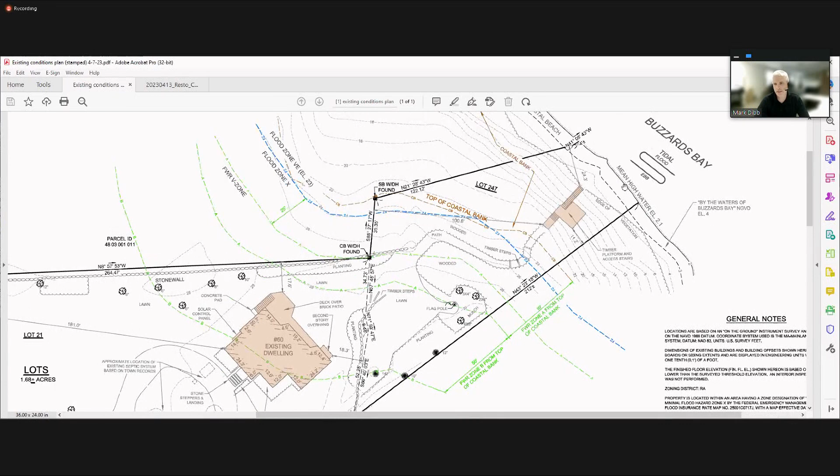On the parcel, in the upland portion, there's a tennis court, turnaround driveway, existing dwelling, and a detached garage. In the area where the work is being performed, the property has kind of an odd shape, but it does slope down towards Buzzards Bay. Resource areas on the site include land under the ocean, land containing shellfish, a coastal bank, and the buffer zones are shown on the plan as well.

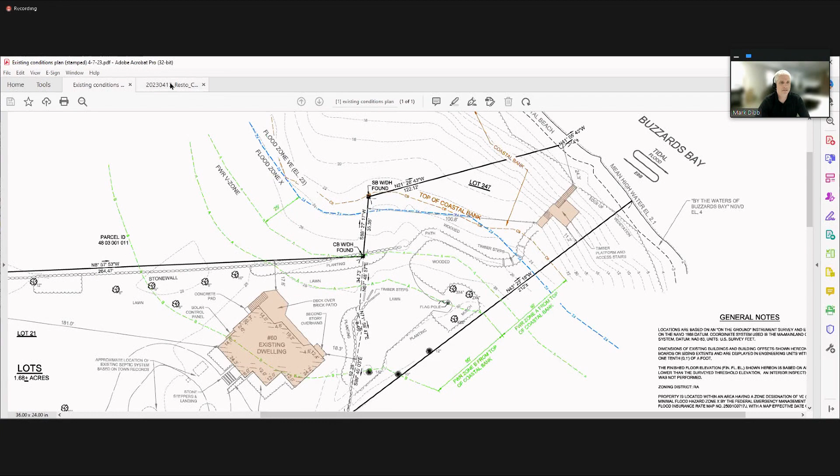Basically, at this point, I'm going to give it over to Matt Lautenberger to describe Wilkinson Ecological's design for the project. Thanks, Mark. I'm going to go ahead and share my screen if that's okay. All right with everyone. I think I have to stop sharing here. Hang on, okay.

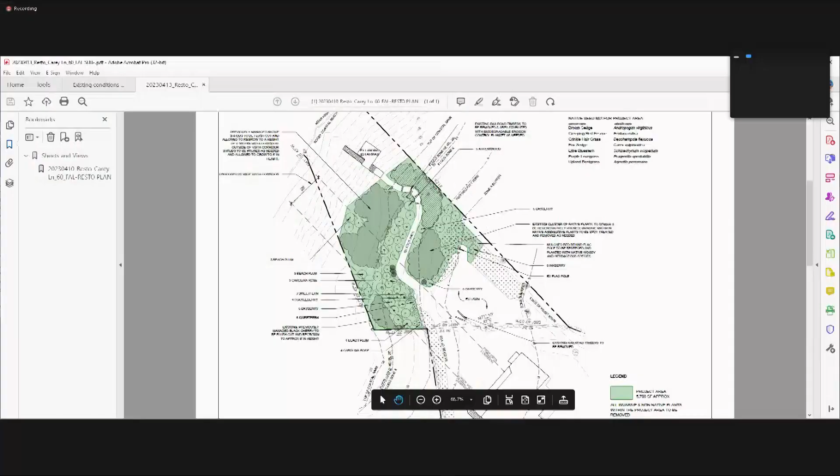All right, everyone can see that? Yes, yes, okay. So the plan itself is relatively simple. There's invasive species on site that we're proposing to manage.

I'm going to go right into the staff comments point by point. The staff has concerns about the proposed flush cutting. So just to specify, in case there's any confusion over where we're proposing the flush cutting, there's specifically a previously pruned cherry tree over here that we're proposing.

And then we'd also be proposing the previously pruned bushes that are in the view corridor. We wouldn't be flush cutting anything that was outside the view corridor.

And the specific reason for doing this is that it would give the plants a chance to regrow. Right now they're very block-like, all of the vegetation's up at the top of the plant due to years of just regular pruning. Flush cutting it would give it a chance to regrow and have a natural, healthier biomass.

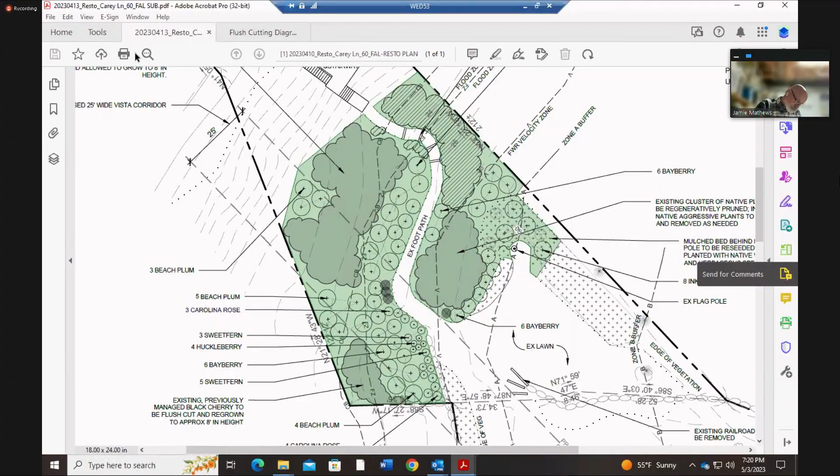Matthew, we'll have to have the plan revised - thank you for going through the staff report point by point, that was helpful. But in the area where you have the flush cut shrubs to be maintained to a height of 8 feet, when we go to staff comment number 4 about shrubs outside the vista not to be managed to any height - it's because in that area you have that 8 foot note. So we just want that taken out. When we come back to you with another updated plan, we'll split that into 2 different management areas, separate. And then the 8 foot height on the shrubs, when you're pruning them, just take that off.

Okay. And I was reading something while you were talking about the cherry. What's the point of managing the cherry to 8 feet in height?

So again, right now the cherry is very beaten up. When it grows in, it's very patchy. The nice thing about cherries when you flush cut them is they spring back right away, and we've seen multiple examples of this. It's something we do pretty regularly, where the cherry can get as high as 4 feet in a single growing season. I actually have some pictures of that if anyone's interested. It'll just provide that area, it'll function more as habitat and as a tree should be functioning in the environment when it has a chance to be flush cut and then regrow like that, because right now it is sort of sickly.

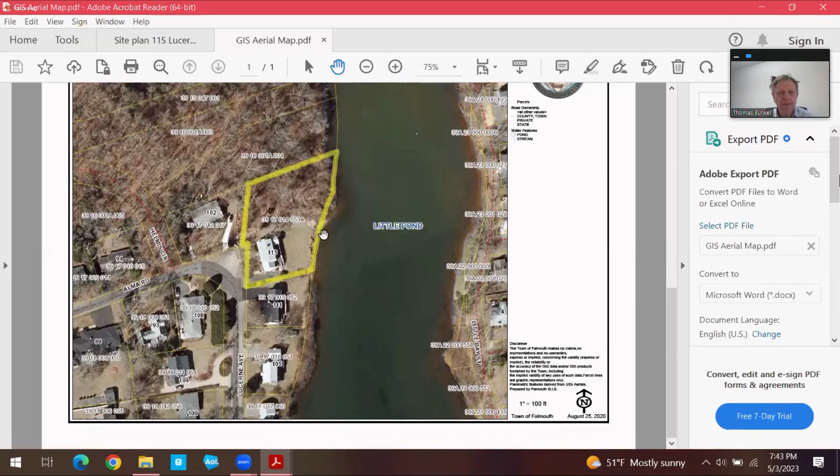So this property, as shown in the locus map and described in the narrative, is at the northeast corner of the intersection of Alma Road and Lucerne Avenue. It's this property right here. It fronts on Little Pond, toward the upper reaches of Little Pond, where it's slightly tidal still.

They have, as described there, this lot here, which was historically part of the house lot. And at some time 5 or so years ago, maybe a little longer, this vacant lot was added to the property. That was when it came up that this subdivision, Helmus Circle, or this land was being subdivided, so they acquired this piece as a sort of a buffer.

It's noted by the staff that there has been cutting going on there, cutting and some grading and things going on in this wooded part. I could tell you that Mr. Volpe is quite interested in native plants, the natural community, and he's also quite active in cutting out bittersweet and other non-native plants. So there are paths and such cut through there, but it was really, in his opinion, for the betterment of the project. Although cutting was done in there without permission, and the staff has comments on that. So we'll get to that.

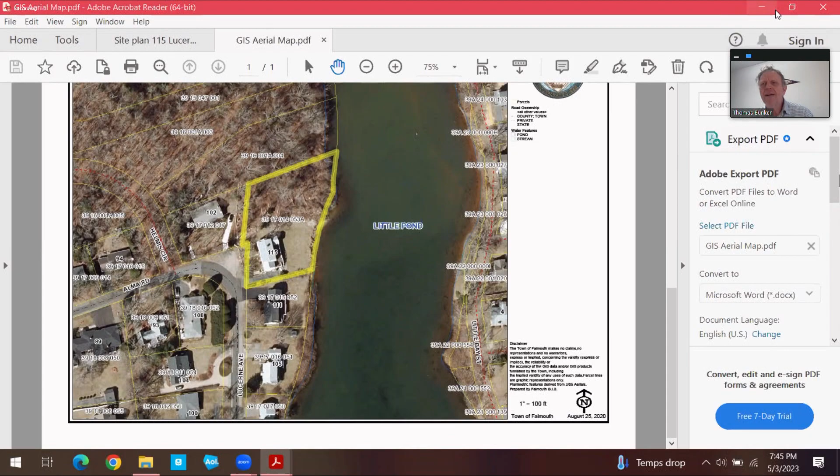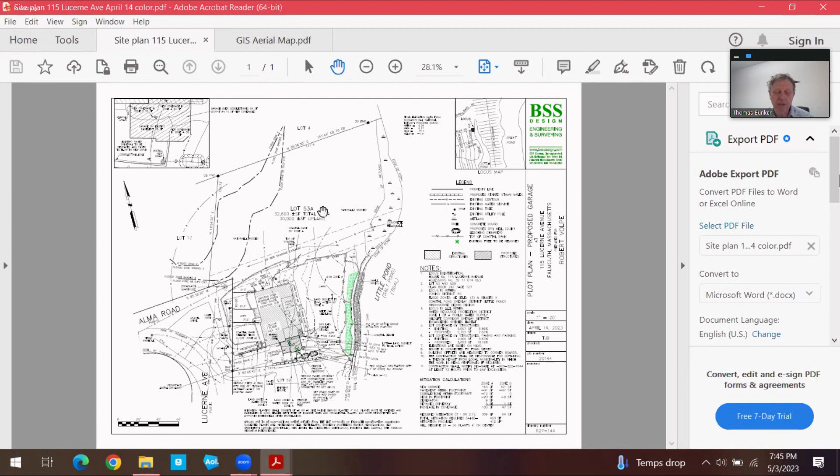So then we have this. I was aware, he showed me around some of this area. I wasn't aware of everything that was going on in there, but aware that he was cutting vines. It was not, in my mind, part of this project, but it is some unpermitted work on the property.

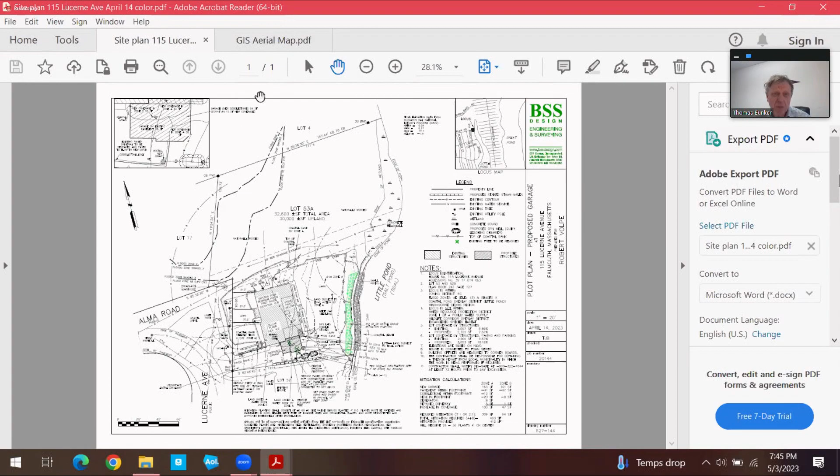But anyway, what the project here was filed to accomplish was to construct a one-car, fairly awkwardly shaped one-car garage here. It's trimmed off, a little extra narrow here for zoning reasons, and it's trimmed off here to not go closer to the existing house. This corner would have brought it about 2 feet closer, so it's cut off about 2.5 feet. It is cut off at this corner in each direction.

Proposed here, and part of this garage will actually take up some of this porch, which will be trimmed back by 2 feet. And the driveway will be rebuilt, currently the water flows through. There's been some subsidence, you can see the pavement is in poor condition. There's water that flows down from Lucerne Avenue down this hill. There is a drain in this location, but that has somewhat failed, so it fills up and spills over. If you went there, you probably saw some sort of spillways going down toward Little Pond here.

The proposal, I can show you a little better in this enlargement. This shows the coverages in that the garage is going to be built partly over the existing pavement. This area is currently not paved, so this is all new coverage here, and this new coverage here. There are some cobblestones here, so we're counting about 50% of that area as coverage.

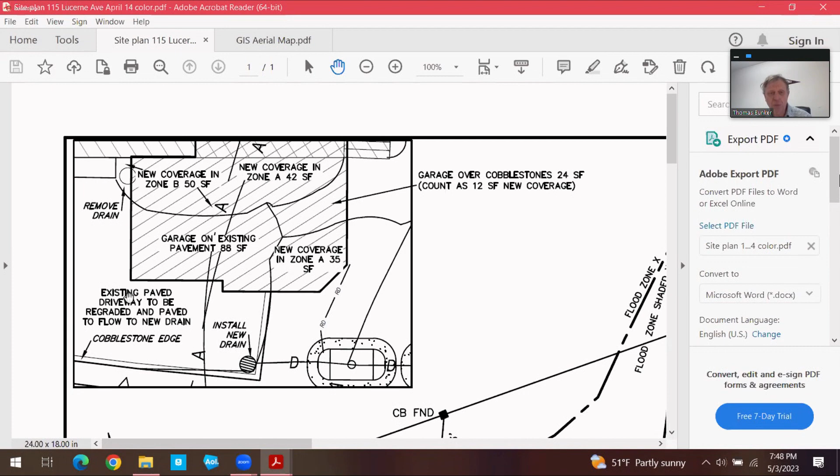And we'll put an edge on it to catch water, and this will be the new low point of the driveway here, which will catch the water and go into a couple of these infiltrators, Quik-4 infiltrators with stone around them to drain. Also it will be connected, I think on the other one, to the drains from the garage roof, which will go into these as well.

This area through here currently, there's a retaining wall in a flood zone, so it's considered a coastal bank, and he wants to rebuild that retaining wall. So this technically is work on a coastal bank, but the wall is pulling away from the house at this corner, and sediment is going through. So it will make it a more stable coastal bank, and instead of one tall wall at this corner, it'll go up about 3.5 feet, and then the next section of wall will be set back another 3 feet, with planting in the terrace in between them.

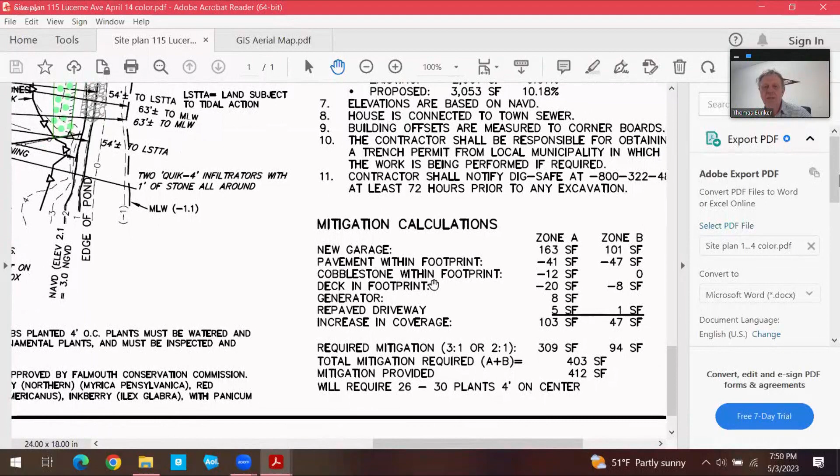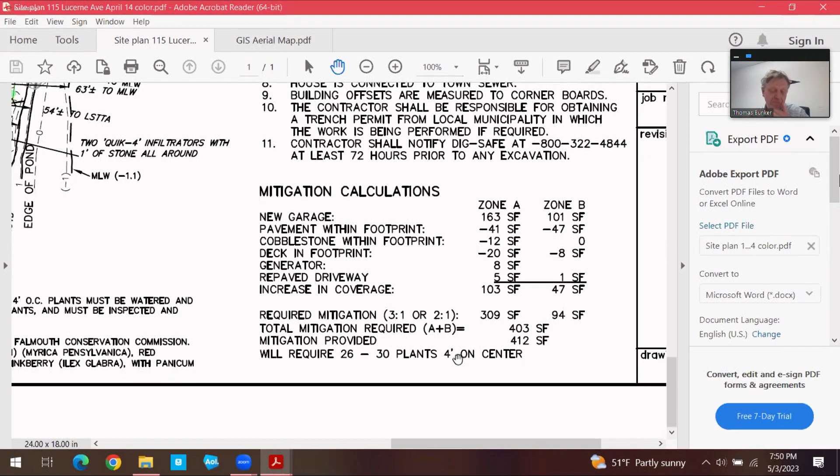The generator, the driveway. So I have 403 square feet required, and it's shown as 412. We had suggested 4 feet on center. I understand that staff wants the 3 feet, but we have that spread out along the shore here. I can go through a couple of the staff comments. There is a sandy area here, and some of these things were there before Bob Volpe and Sandra were involved in this, but staff recommends to restore this as lawn.

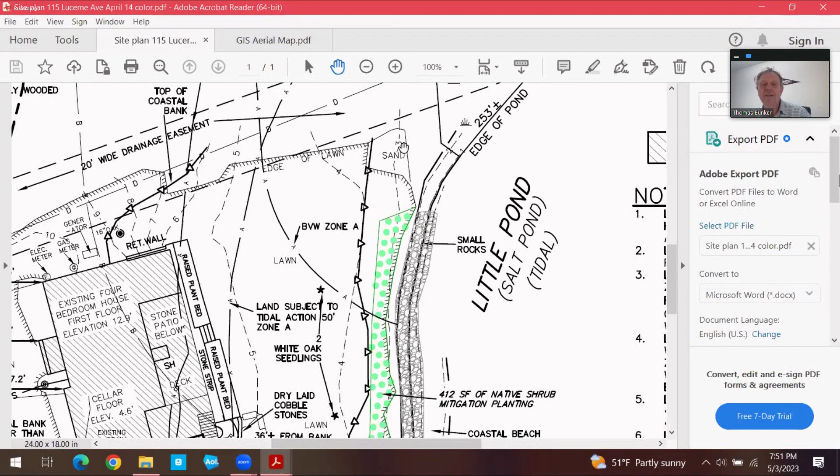It is currently, he says, a snapping turtle nursery. They come up there every spring to lay their eggs. So in a way it serves an environmental purpose to have that sand there. And I mentioned some of the other things where he had been - he likes to nurture plants, transplant them from other places and put them in here. So it is kind of an active area.

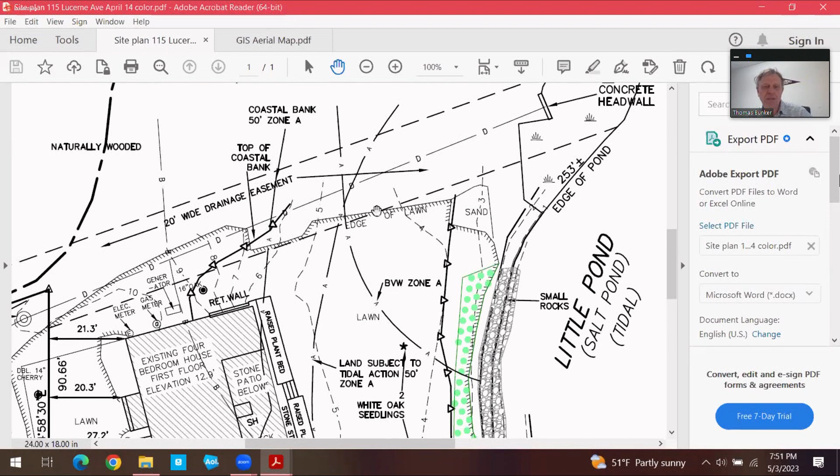I think we will have to have the meeting with staff on the site to go over it. Unfortunately, they're out of the country right now, but I think they're out this entire week. We'll be back next week.

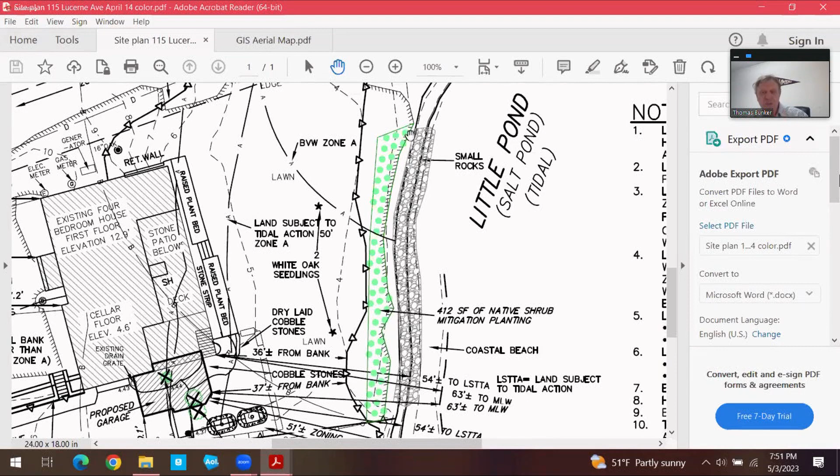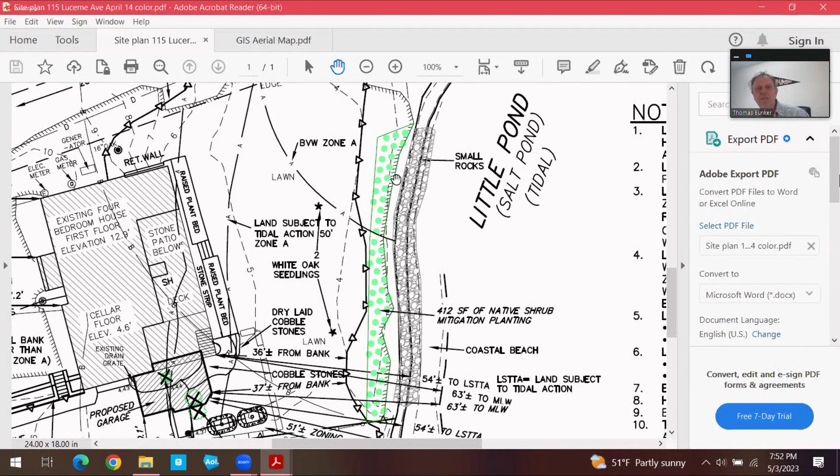And the several points that he made by a long distance email, he would like to have those grasses. He feels like the grasses are very good - the root system of those grasses are very good at holding the soil to reduce any erosion along here, the grasses. They would like to put the mitigation inland of the grasses, if we can leave that, but these are things that I think we can discuss with staff on the site.

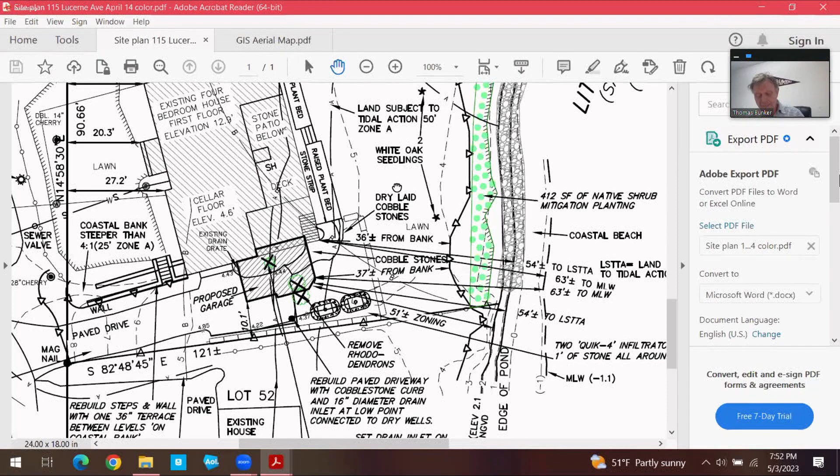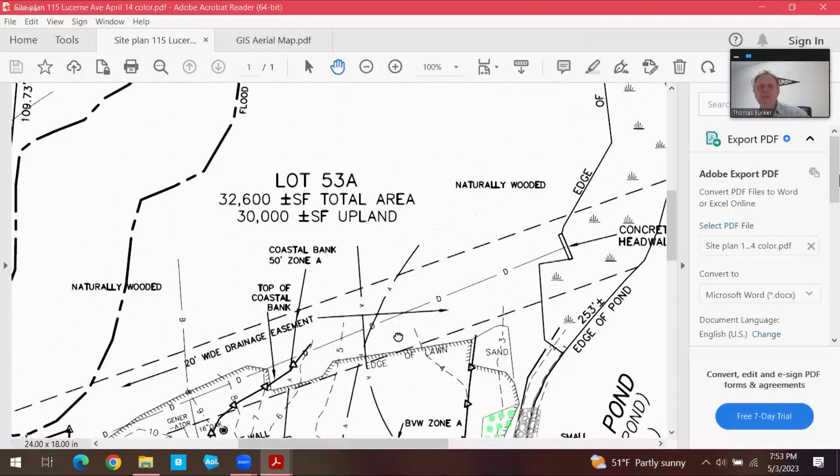There are a couple other things about the trees. Again, he had said that it's how the property was when he got it, which I know happens to a lot of people. He wasn't aware, and I wasn't aware, of some of these items that are in the staff report. So I will have to request a continuance because there are things here that I can't address at the moment. But I'll make notes as we go through staff comments. I'll take this down, take your comments, and then we'll get on with the continuance.

Thank you, sir. Ken? Yes, Mr. Chairman. So you're suggesting, Tom, that we continue this out towards the end of May so we can meet with your clients, correct? Yes. Okay, and that's to address the little garden area and the clearing and the ornamental grasses.

I think the ornamental grasses should be removed in that area, planted with shrubs. And if they wanted deep-rooted native grasses, that's behind the shrubs, and they wanted to put some amorpha in along the top of that wall, I'm fine with that.

If the area is being used by a snapping turtle, maybe we can put plants in front of it, put a little fence, like a little single rail fence. I don't know, but I'd have to go out and look at it. I know Melissa's been out there to do the field work. So I think there are certain things we do need to discuss, especially the managing of that adjacent property.

As far as the garage, I don't have any concerns, Mr. Chairman. Like I said, I believe that the ornamental grasses need to be removed and that native shrub layer go along the top of that wall, but that's something we can discuss with the applicant if they really want to discuss it with us. And then I think that we just need to be able to address the clearing on that other property. Right.

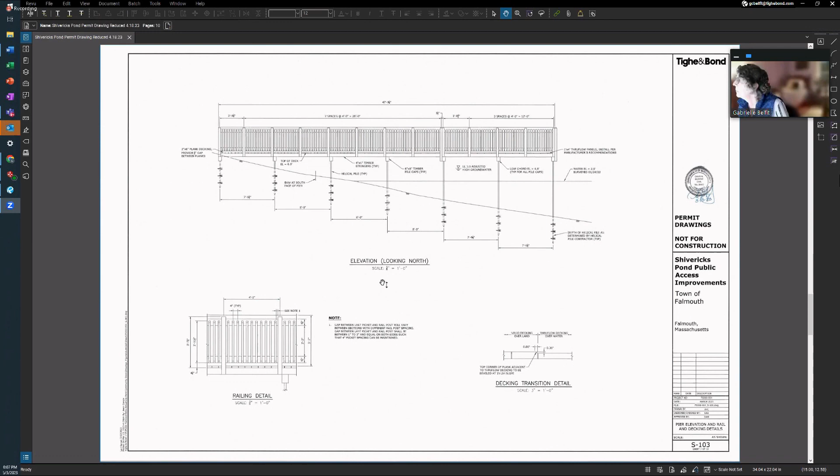Jed, do you have anything you'd like to add before we open up to commissioner comments and staff comments? Thank you, Mr. Chairman. For the record, Jed Cornock, Town Planner. No, I have no additional comments to add at this time.

Okay, I want to throw the opportunity out there. Jen? Yes, Mr. Chairman. So to follow up on Gabrielle's introduction, I first started talking about a pier in this area over 8 years ago with Paul Dreyer, who is on the planning board and was a member of the Coastal Resiliency Action Committee. I see Paul is in our attendees list listening. He and I stood where the dam is right now, where people fish off of, and started having the conversation with the town engineer that it was kind of a dangerous situation and we wanted to provide a more secure and safe fishing access point for the public on this pond. I think that through that conversation, that's how the 300 committee got involved, looking at all of Shiverick's Pond and improving all of this.

And this is kind of phase one of a larger project that this board is going to see. You're going to see a creation of a park on the parcel next door, so that will be coming shortly under a separate notice of intent. So this is kind of a master plan of this area. As Gabrielle alluded to, we've done some vista improvements. The town is going to be improving that roadway, adding a 10 to 12 foot shared bike and pedestrian lane on that side. So there's a lot of big improvements being proposed by the town in this area.

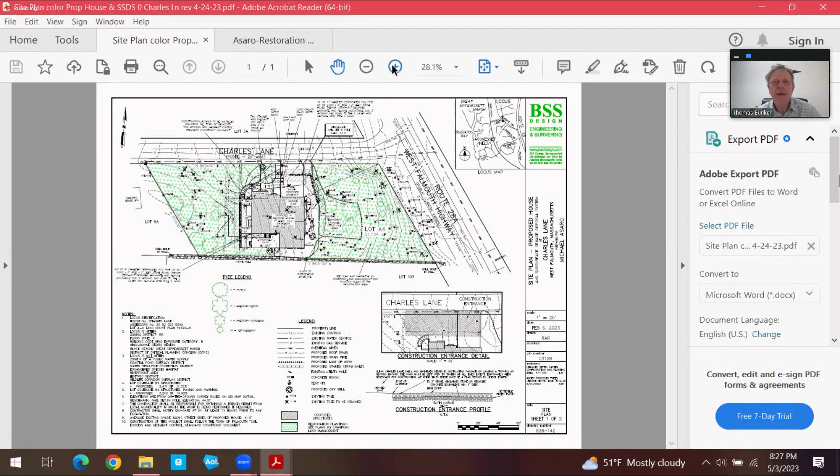So in our plan, we changed the planting to reflect what Crawford Land Management has put on their plan. As staff noted, CLM added more trees, so we have their trees noted on this plan. But we did not get into the type of fern or huckleberry sod. The septic tank that Jamie picked up is now an H20 tank, and that's also reflected on the profile on page 2. So that was our change.

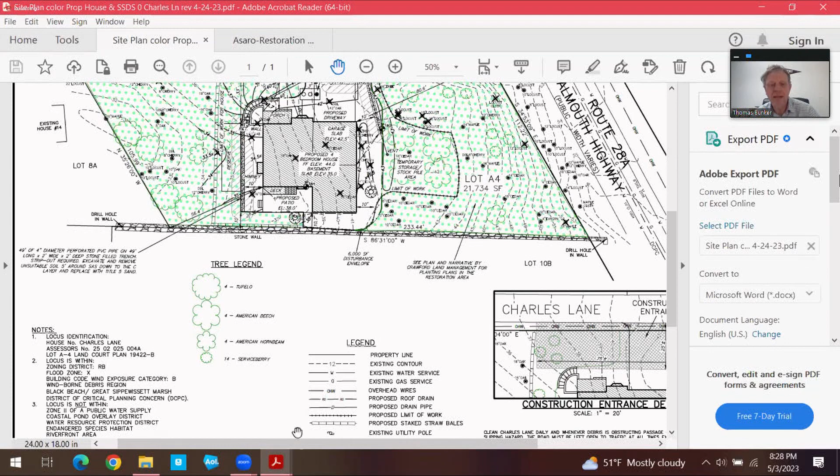There were no other changes from our side, except that we changed the planting plan according to what they had. So on their plan, this hatched area right here along the south and west was noted as hay-scented fern.

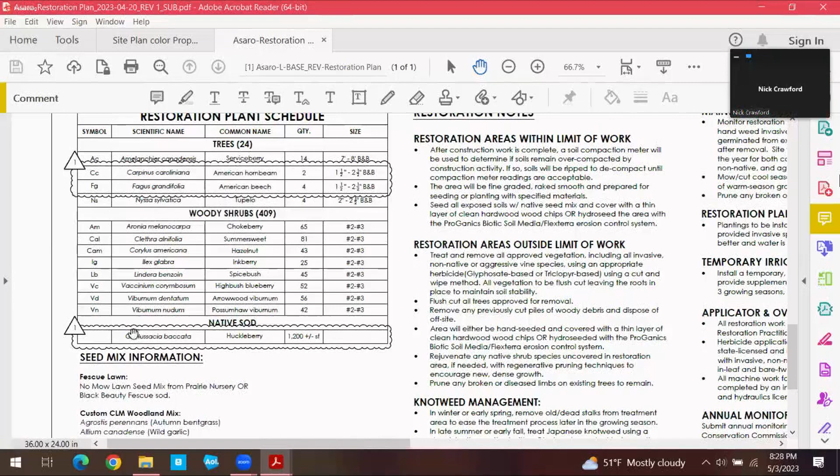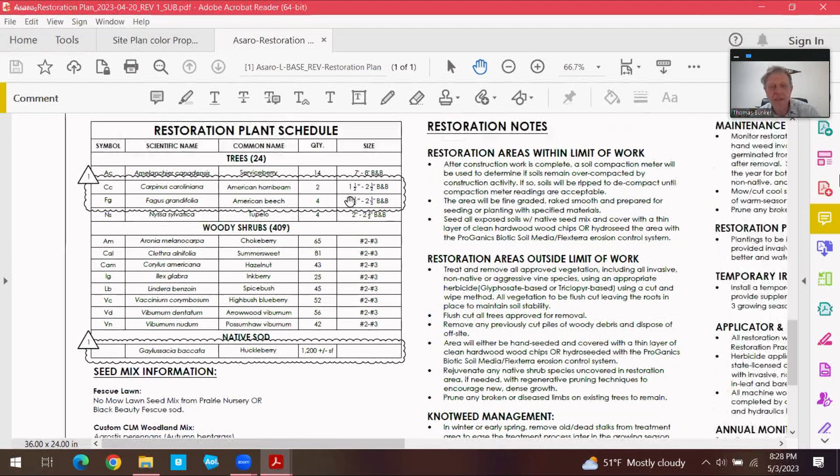But now I can go into - maybe I'm doing Nick's work here, maybe he won't have anything to say, but that's okay - Gaylussacia baccata, black huckleberry. I believe there's no hay-scented fern, just the huckleberry sod here, 1,200 square feet of it.

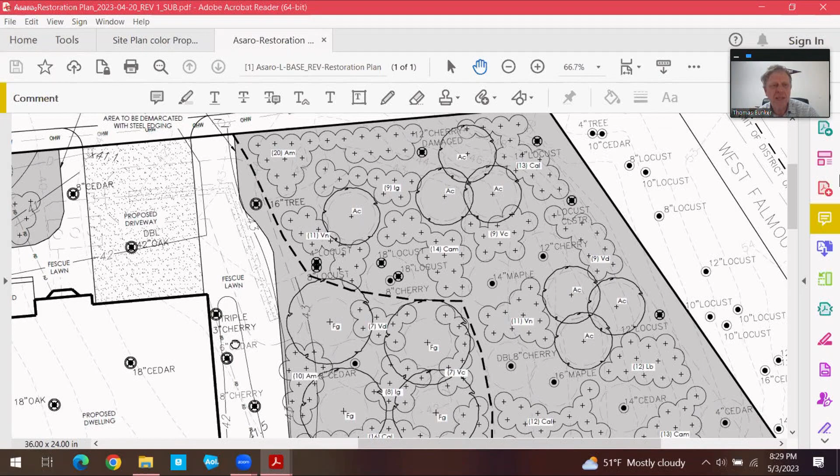And they added more selection of trees. I think it's because they took out - so this, the FG, is the American beech. They took out these locust trees, which was one comment; they said locusts are not native anyway. So they took the locust trees out and added other trees around them. I'm not sure about the AC, but if you need more explanation of the planting plan...

I will leave it up if Nick wants to put the plan up. Yeah, you can leave it up. So, Nick Crawford from Crawford Land Management - I think Tom hit on all the highlights.

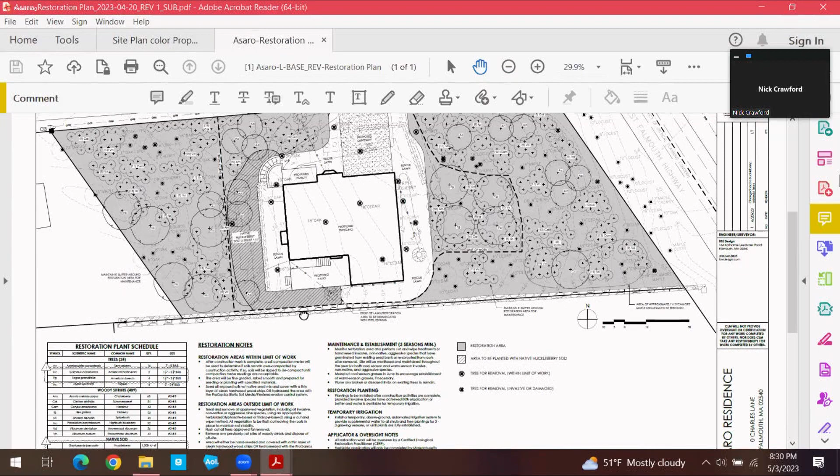We switched the hay-scented fern sod to the native black huckleberry sod, since there is already an existing overstory that adds a woody understory layer. We added 6 trees, 4 American beech and 2 American hornbeam. That ended up reducing the overall shrub quantity by 20 shrubs, just because we were giving the trees a 5-foot diameter buffer around the trunk that wouldn't be planted, in order to not affect the root zone. Those are really the only changes.

We had talked - I know Jen at Crawford had talked to Jen Lincoln - about switching the hay-scented fern to the black huckleberry. So I hope, I saw that there were no staff comments. If there's anything else you'd like explanation on, I'm here to answer.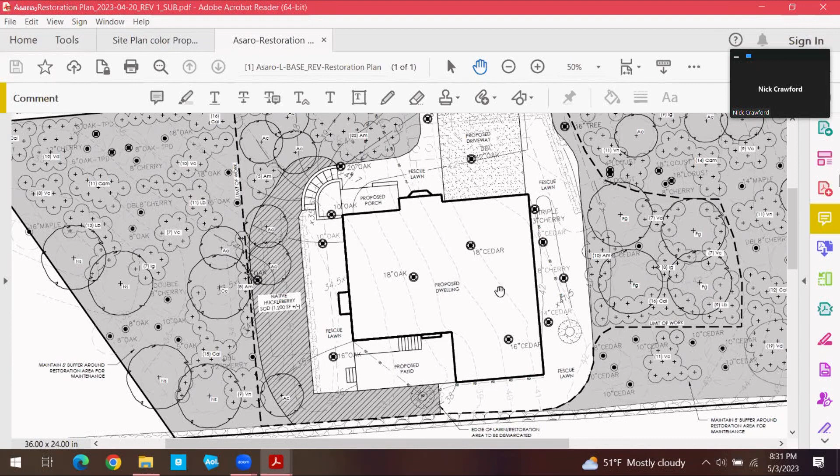Will I stop sharing? Thanks, Nick. Yes, sir.

All right, Jen. Yes, Mr. Chairman, I believe when Nick Crawford mentioned switching out the hay-scented fern to the huckleberry sod, staff was in agreement with that at the last hearing. So I have nothing to add.

Okay, Ms. Bergeron? I also have no comments. Thank you. All right, commissioner comments. Let's see, Courtney - no comments. All right, I'll just say thank you for addressing all our concerns. Thank you for the revisions.

Maury - I only have 2 comments. I would like to see, where they have the fescue lawn, the no-mow lawn seed mix from Prairie Nursery or Black Beauty fescue sod, that it's not going to be sod. And the second thing is just a comment: we're always about the 3-gallon or 2-gallon, 3-foot on center.

On Tom's plan, we see all the little dots that make it look like it's really going to be full. Then we go to the Crawford one and it's not really 3-gallon or 2-gallon, 3-foot on center. I think we need to start being consistent, just like we were on that one on Lucerne - that if we want dense planting, we don't want these little pockets that are 8 and 10 feet on center; we just need to be more consistent. Tom's plan looks beautiful with all the little green dots all over it, making it look fully vegetated, but the Crawford one just shows little pockets around the tree. So that's my only comment, and I think we have to be more consistent, and no sod.